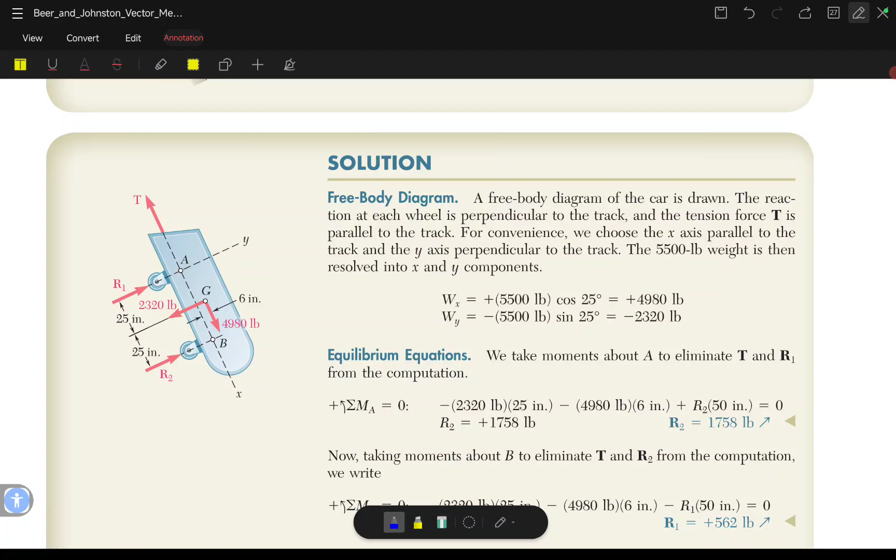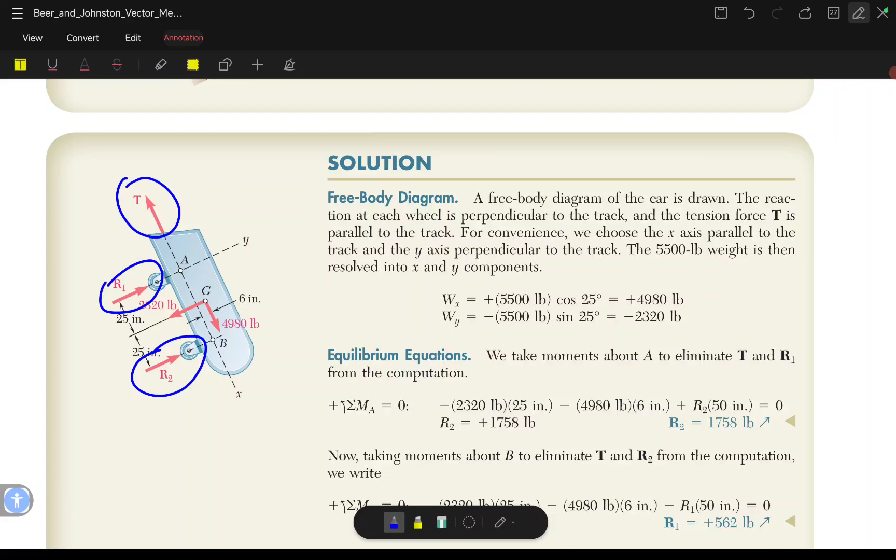Okay, pa down. Pero of course, kuhaan na siya sa 5,500 pounds iyang vertical and horizontal component, Fx and Fy. So basically, mao na ni ang Fx component and this one now is the Fy component. Kining Fy kay 2320 because as you can see the axis X here and Y here. So this one, 4980, mao na iyahang X component sa iyang weight and the 2320 pounds, that's the Y component of the weight.

And after writing your free body diagram, magpili na ka unsay mong gamiton nga equations of equilibrium. So as you can see, gigamit niya ang summation of moment at point A. Why? Nganong moment at point A man? Because as you can see in the free body diagram, unsa may mga forces nga moagi sa point A. Point A because ang moagi ana si R1 ug si T. Actually, pwede pud point B. Ang moagi ana si R2 ug si T. But in this case, let's take kung unsa ang iyang gigamit. So, nag-moment siya at point A.

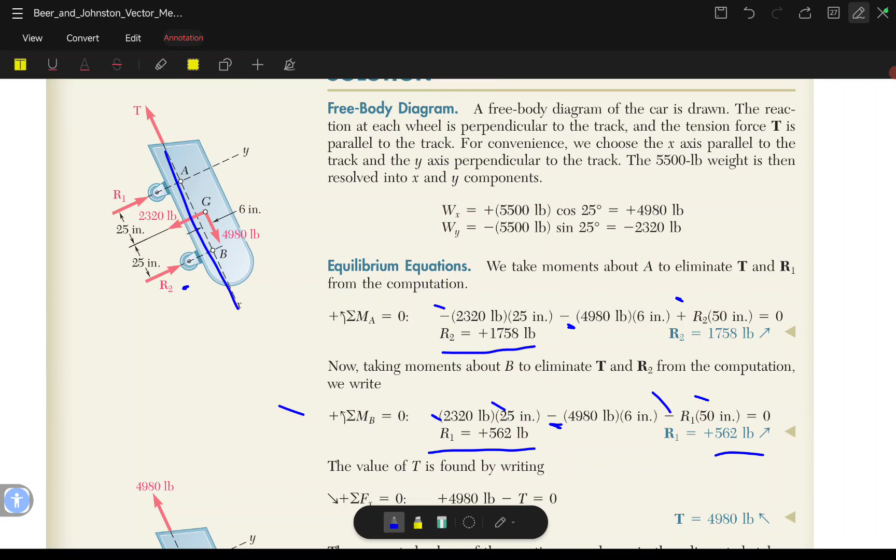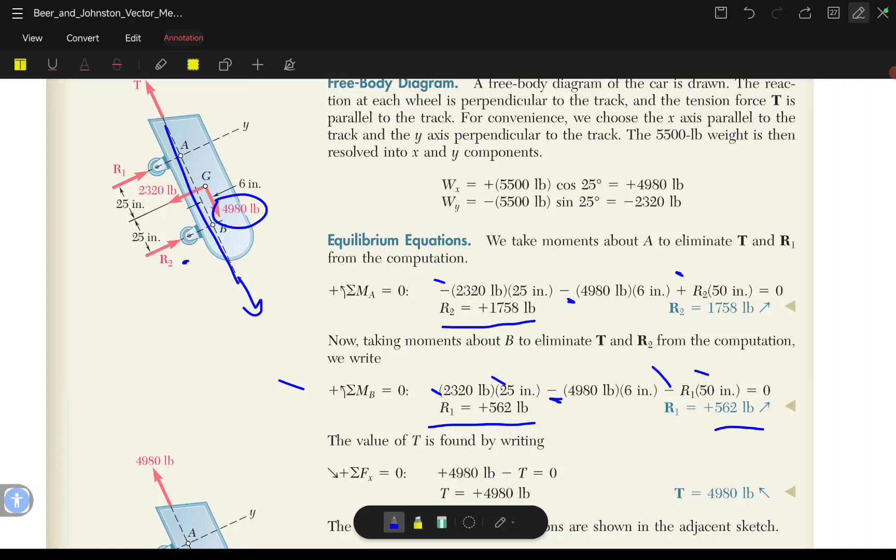So, kung si T na lang, pwede mag-summation of forces at X or summation of forces at Y. But in this case, si T kay along X man siya. Diba? As you can see, si T naa sa X-axis. Okay, so mag-summation of forces at X na lang ta. Summation of forces at X: 4,980 positive, kasi X going this way is positive, going that way is negative. So, positive minus T. So, T now is 4980 pounds. Okay, it's in tension. So, that is correct.

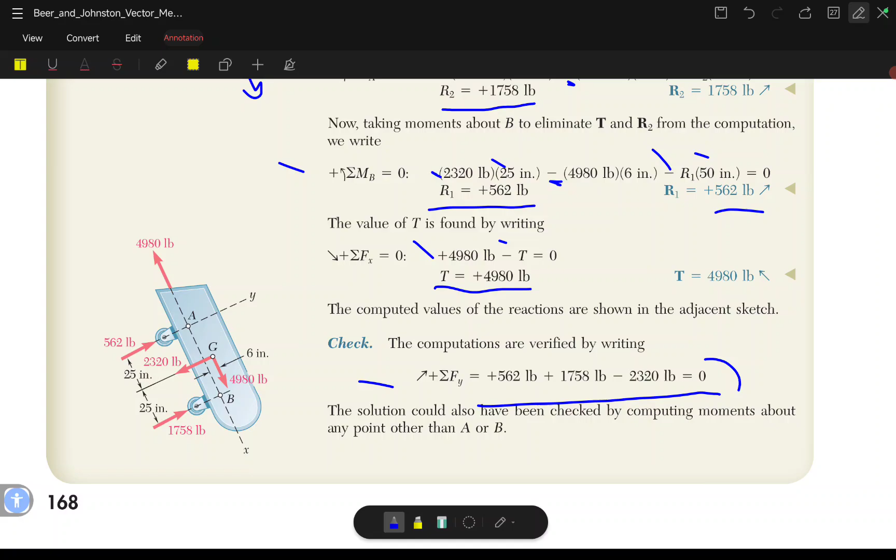Now, you can use summation of forces at Y to check your answers. You put all the forces at Y there. If that is equal to 0, therefore, your answer is correct. Okay, so that's the solution for sample problem 4.3.